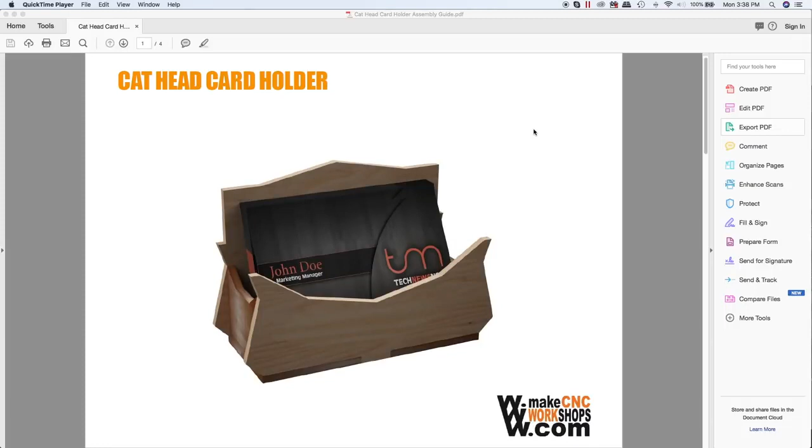In this video, we are going to make the MakeCNC.com business card holder. This is one of 5 projects that we've partnered with MakeCNC on. And as an owner of a STEPCRAFT CNC machine, you can receive these files for absolutely free for your own use. And this is a great way for you to get started with your new CNC system.

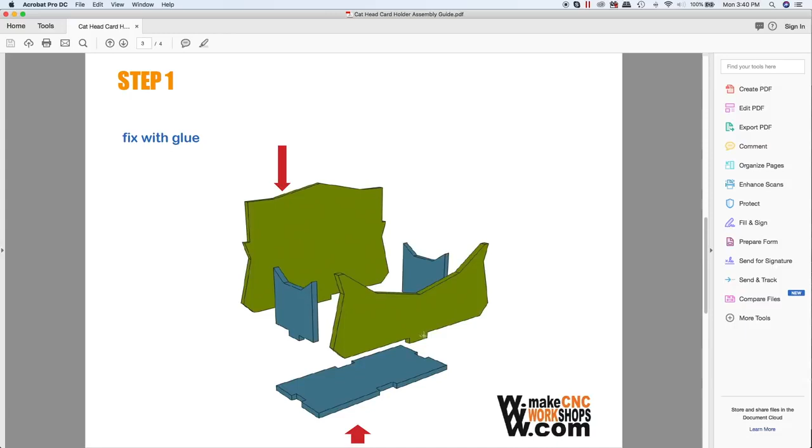So if you scroll down, every project that you get from MakeCNC comes with this really nice digital instruction manual that's full color with nice photos. And you can see here as I scroll through, these are the 5 pieces that we're going to be cutting out on the CNC machine. And here is the assembly document that shows you how everything goes together, and you use glue to attach them. And this is a side view of the same business card holder.

So it's a really cool project. It's simple, but it does give you a good overview on how to use some basic functionality and importing DXF files into Vectric, and how to output the G code so you can run this project on your CNC.

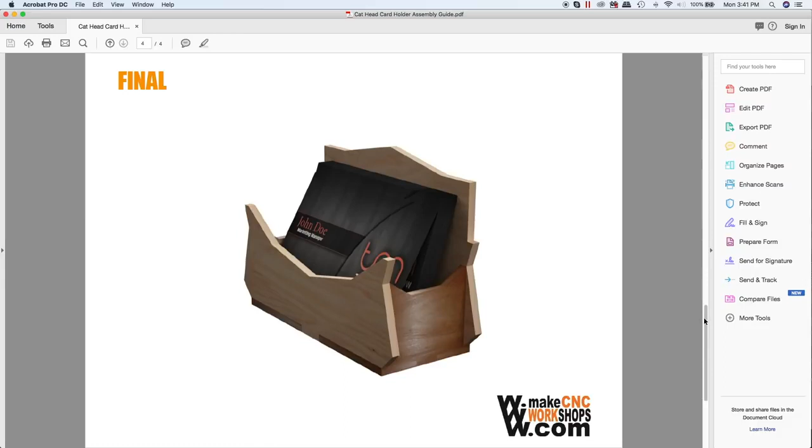Now, one thing that's important to notice is this is a puzzle project, and all the MakeCNC puzzles have these kind of tongue and groove and keyways that they use. So this front panel has this tab that's down here, and then the bottom panel has this notch out here, so this tab fits in this notch.

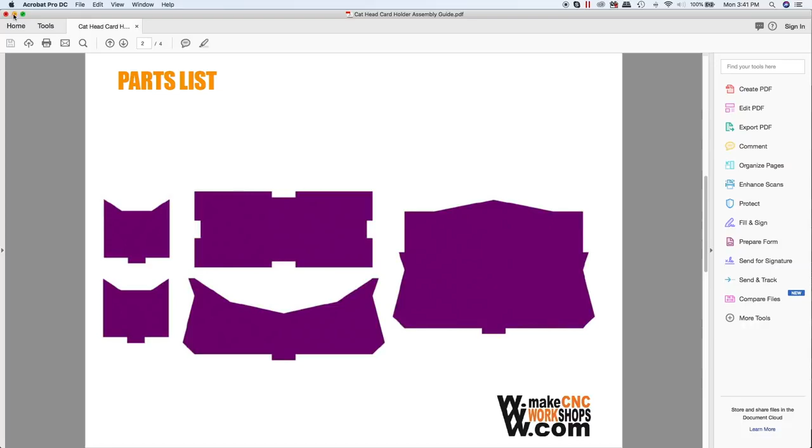Now, one thing that we're going to have to deal with is the fact that with a CNC machine, we're using round tools, which means we can't get a perfect inside corner. If you were cutting this with a laser, you could get a square inside corner, but with a CNC machine, you're always using a round tool. Even if it's just a small 1/16 inch end mill, you're still going to have a radius in the corner. So let's dive right in, and I'll explain to you how to do this project.

Okay, so the first thing we need to do is open up Cut2D. Now, it's important to mention I'm using Cut2D Desktop here because you really don't need Vectric's top-of-the-line programs in order to make this project. However, if you have VCarve, VCarve Pro, or Aspire, you can do the same thing. All the same functionality appears. It's just Cut2D is the base program that we sell, and the desktop version has the 24 by 24 inch limitation. But again, for this project, it's perfect. So it's a great program, and we're gonna jump right in here, and I'll show you how to do this.

So the first thing we're going to do is create a new file. Now, I went and bought a piece of wood from Michael's Crafts. It's from Revel. It's in their hobby section where they'll have like balsa wood sticks and plywood, etc. And I bought a piece that was 12 inches by 24 inches, and they label it as 1/8 inch thick. So this project's not very big, so I've set it up for the 12 inch width. I've set my height up to be 6 inches. And I put 0.125 in as my thickness, so 1/8 of an inch.

This is a single-sided job, and I'm going to position my Z0. This is where the tip of the end mill is going to touch against the top of the material for its 0 position. You can do either the top of the material or the machine bed. For this particular project, we're going to use the material surface. The XY datum, what that means is that's the position on the XY on the machine where you will put your end mill and 0 out UCCNC.

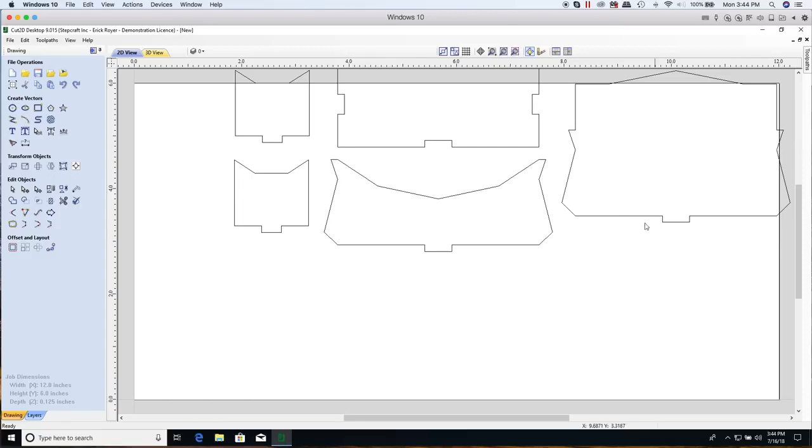Okay, so here are the pieces that they give you, and everything is set to 1/8 of an inch. So the first thing I want to do here is I like to center everything in my workspace just so I can see it here. So we're going to click the Align tool and Align to Material. That's going to move everything nicely to the center.

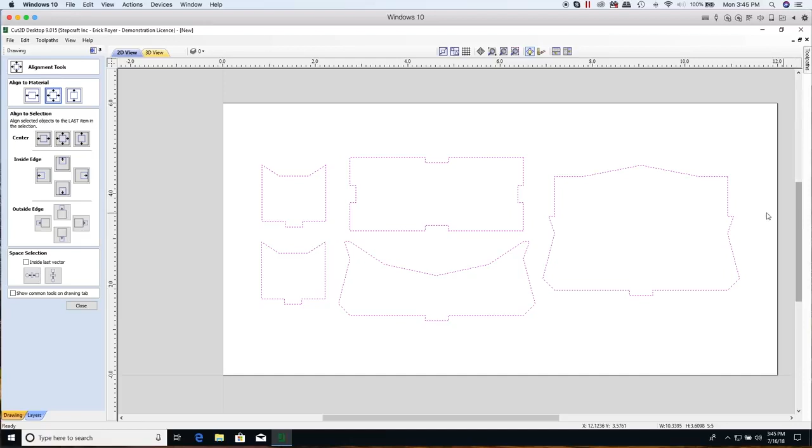You may see my zooming in and out appear fast quite a bit. That's my magic mouse on my Apple that I'm using, and it's a little sensitive.

Now, again, what's important here is this file has been scaled to 1/8 of an inch. So what that means is that they're counting on the thickness of each of these pieces to be exactly 1/8 of an inch thick. And when this side piece is standing up in this slot, the face of this should be even with the face of the wood here.

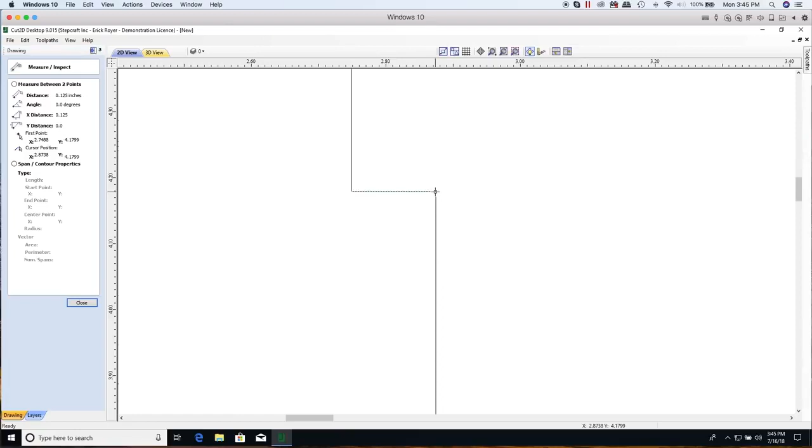So if we use the measuring tool and we zoom in here, we can see that this is exactly 0.125 inches deep right here. Okay, the reason I mention that is because not every piece of wood is the same thickness. And even though they say it's 1/8 of an inch, it may not necessarily be 1/8 of an inch. For example, this particular piece of wood, when I use a digital caliper on it, is supposed to be 0.125. It's actually 0.121.

Now, why that's important is if the material is thinner than what you've got this job scaled to, then this outside surface is going to match up here, but you're going to have a gap on the inside. The puzzle just won't fit together as nicely. And on other pieces that have a keyhole in the center that you're putting something in, if your wood is too thick, then it won't fit. So that's another thing to be concerned about. I'm always worried more about the material being too thick than too thin.

So one thing we can do here is we can scale this job. So how do we do that? Let's see. So this is already designed to 0.125. So one thing we're going to do is we are going to go to stepcraft.us/scale. And this is a simple scale calculator that we've had on our website. You can put in the original material thickness. So in this case, it's going to be 0.125 inch.

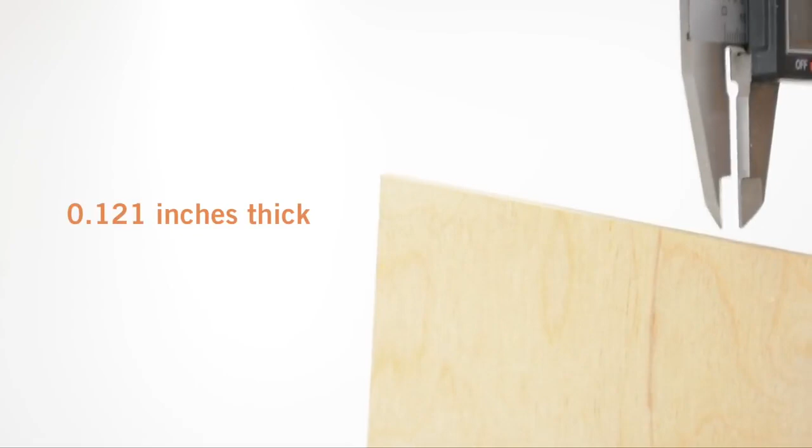When they say original material thickness, they mean the thickness that this job has been designed to, that the DXF file is scaled to. And then the desired material thickness is the actual thickness of our material. I will probably change these in the future to be a little bit more clear on that. So we're going to do 0.121. And then we click calculate. And that's going to give us a scale percentage of 96.80. So we're going to copy that.

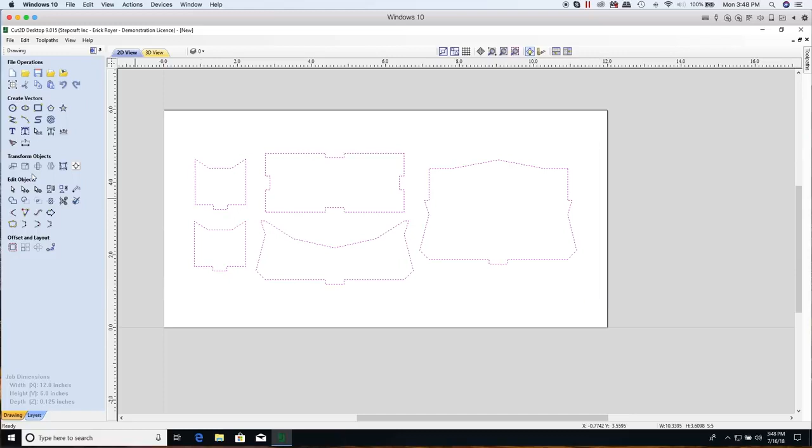Then we're going to go back to Cut 2D. And what we're going to do here is we're going to select everything. And then we're going to go here to this transform object, the second icon in. When you hover over it, it says set selected object size. We're going to click that. And you can see here, first thing we want to do is make sure that X and Y are linked together. And this is going to tell you that this is the overall width and height of what has been selected. And you can see that's at 100%.

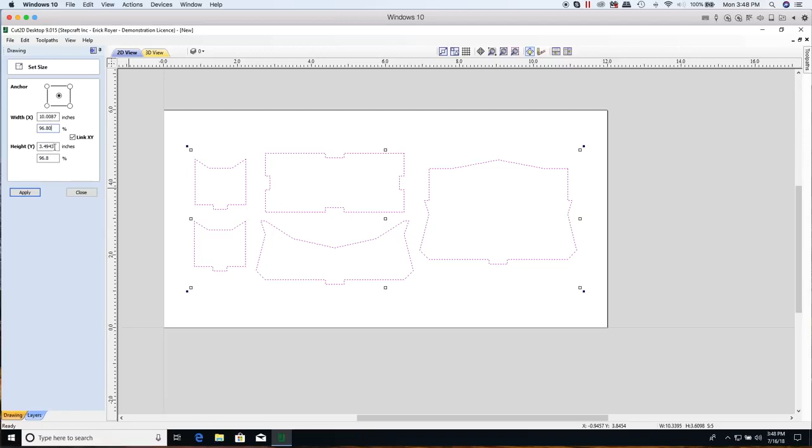So what we're going to do is we're going to select 100%, and then we are going to right click and we are going to paste our new value in at 96.8%. And you'll see what it did was it actually made the width and the height a little bit smaller. When we click apply, you'll see the entire job scales just a little bit.

Now, let's look at what happened here. If we click on the measuring tool again and we click from this corner to this corner, you will see that the new size is now 0.121. So when this piece goes into here, it'll now be perfectly flush to the side.

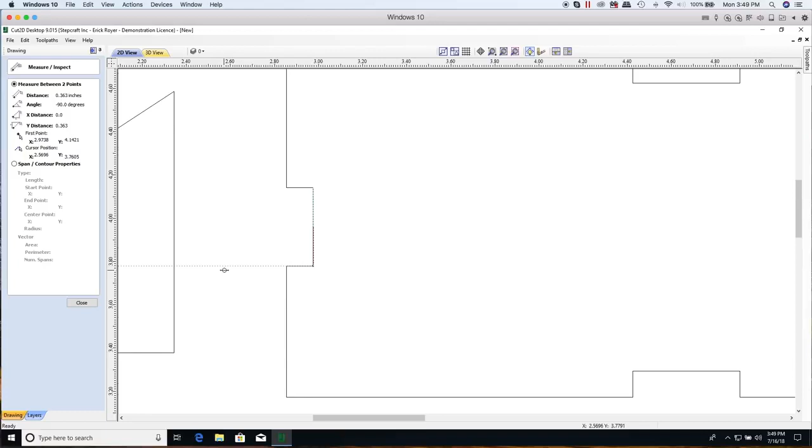And the other thing too is that it also scales the height of the tab as well. So from here to here right now is 0.363. If we were to look at this from here to here, you'll see it also says 0.363. So that's an easy way to scale your entire project down to match your material thickness.

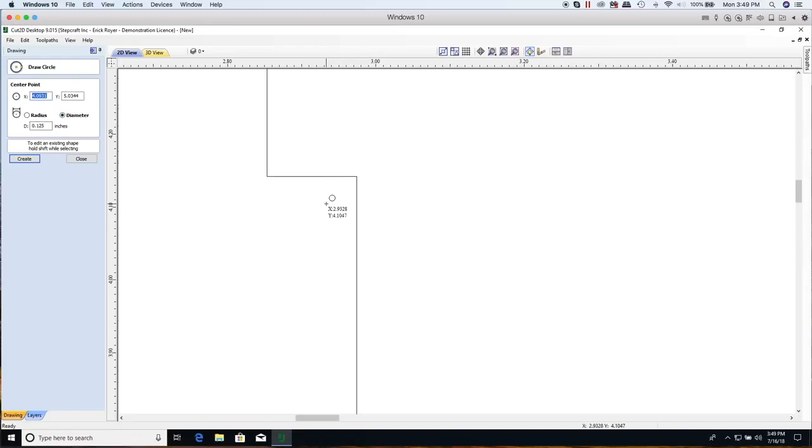Okay, so the next thing we have to look at here is, like I said in the beginning of this video, we do not cut square inside corners with a CNC. What's going to happen is we're actually going to cut a corner that's going to have a small radius. So if I were to create a diameter right here of 0.125 inches, because I'm going to use an 1/8 inch end mill to cut this, that would be 0.125.

So this circle represents my end mill. And you could see that that is as far as my end mill can get into the corner. So we won't have a square corner. We're going to have a rounded corner leaving material right here. And that's going to be a problem for the fitment of the parts. When you go to slide the side piece into here, it's probably going to stop somewhere around here because you can't push it in any further.

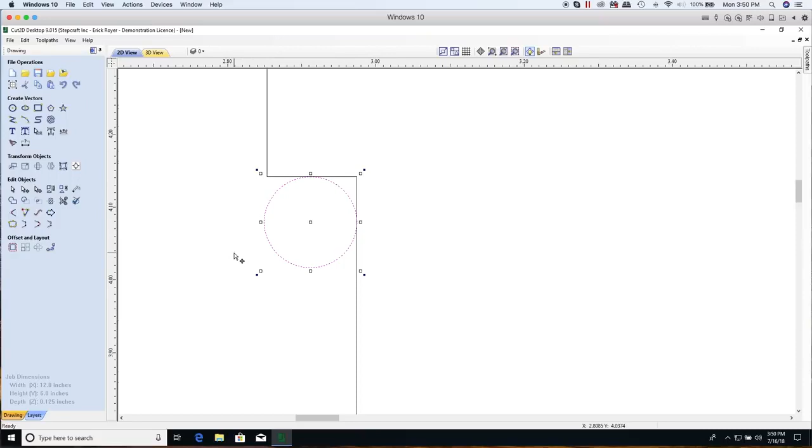So this just gives you an idea what the end mill is. Now what this will actually look like if I were to fillet this corner, this is the actual cut path that would happen with an 1/8 inch end mill. So you can see it's no longer square. That's what you would end up having. So you'd be trying to put a piece that has a square corner in here, and it's just not going to fit. So what we can do here is we can create dog bone fillets.

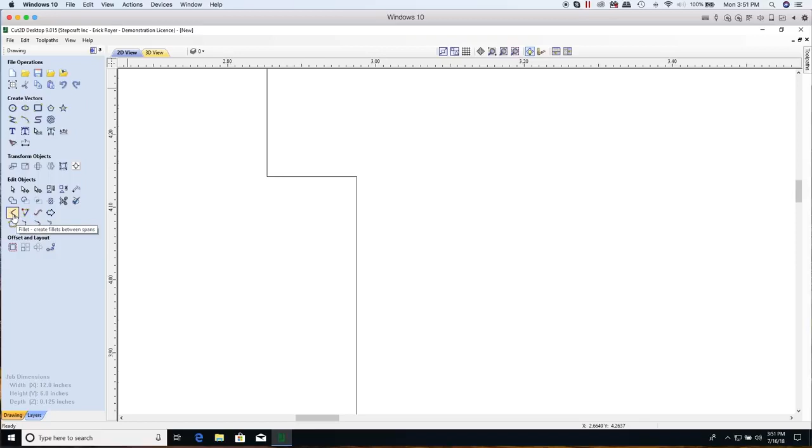And that's pretty easy to do. In Vectric, you can click this button here. It's the fillet object tool, and we're going to click that. We're going to put in the tool radius, not the diameter. So I'm going to use an 1/8 inch end mill, so I got 0.0625, which is 1/16 of an inch, set as my tool radius.

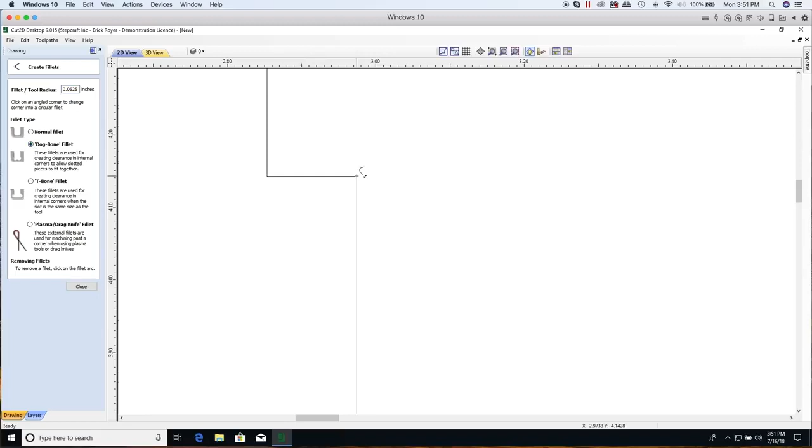I've got two different types of fillets that I can do here. I could do a dog bone fillet or I could do a T-bone fillet, and it really is personal preference as to what the final output looks like. If I were to select a dog bone fillet, you'll see it's going to notch out that corner by the diameter of the end mill. And if I do it on this side, it looks like part of a dog bone. That's why they call it that.

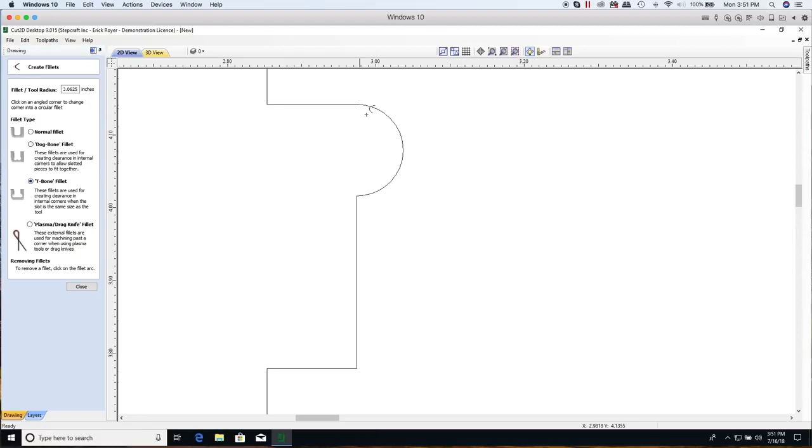The other way we could do this is we could use a T-bone fillet, which is going to basically notch it like this. I don't personally like the T-bone fillet because it leaves too much material open here, and I would rather use the dog bone, and that way I have a little bit of material here and a little bit of material here. So we're going to change this over to a dog bone fillet, and that's what you end up seeing.

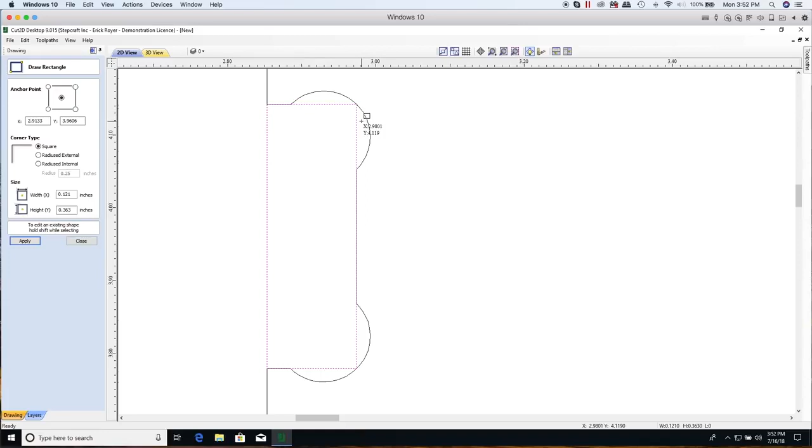Now when I go ahead and I put my piece in here, you'll see now that it will fit perfectly because the corner is cut away, so that side piece is going to fit in without any problems at all. So we're going to go ahead and delete that square I just drew. And now what we need to do is go around and do a dog bone fillet on all inside corners.

So we're going to have to do them here. Again, on the tab, we have to do this because if we don't, the same thing will happen. You won't be able to push this piece down and you'll end up with a gap under both sides. So we're gonna do this. We have to do these here, this one here, and let's see, we got these here, this one here, and that should be it.

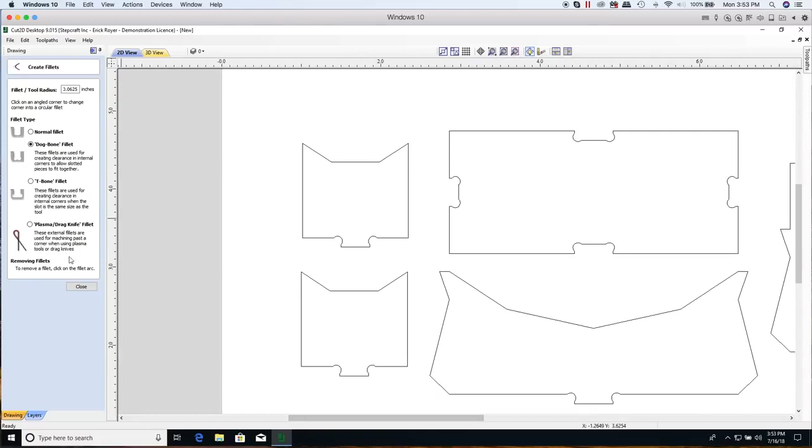So now everything has got fillets on it. Some of the MakeCNC.com puzzles are already filleted, which is nice. This particular one wasn't, which is actually good because I get to show you how to do it.

Okay, so the last step here before we create a toolpath is I don't want to cut this out right now just like this, how this is laid out, because if I do, what's going to happen is I've got a lot of waste material, and why throw away all that material? I could almost make two of these projects in this same space.

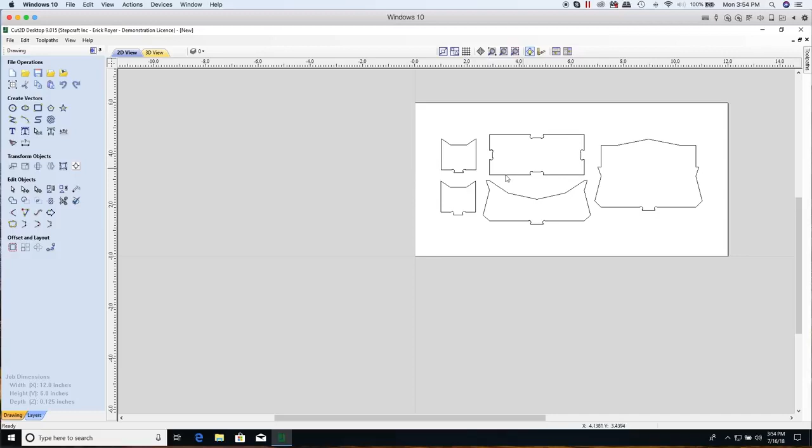So on the Pro version of Cut2D and the Pro version of VCarve, they have an auto nesting feature, which is kind of nice because you could just select everything, tell it your tool diameter, tell it how far you want to space the parts, hit one button, and it arranges it automatically for you. But unfortunately, we don't have that here. So we are going to have to manually nest things a little bit.

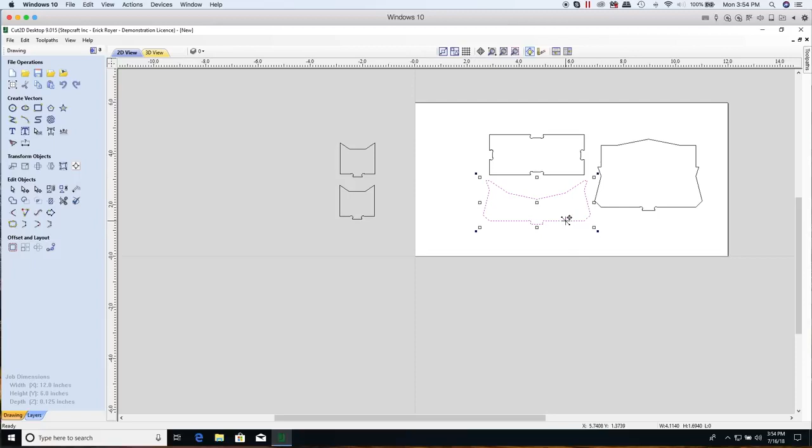So what I'm going to do here is I'm going to take this part here, and I'm just going to highlight it and then double click it, and you'll see all these handles that appear. If you put your mouse over until you see this icon, you can click down and actually drag it around where you want it. So I'm going to move this into the corner, and then I am actually going to move this piece in next.

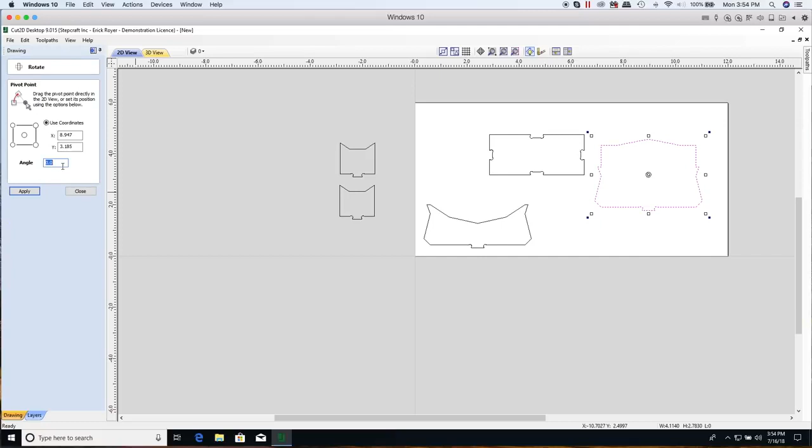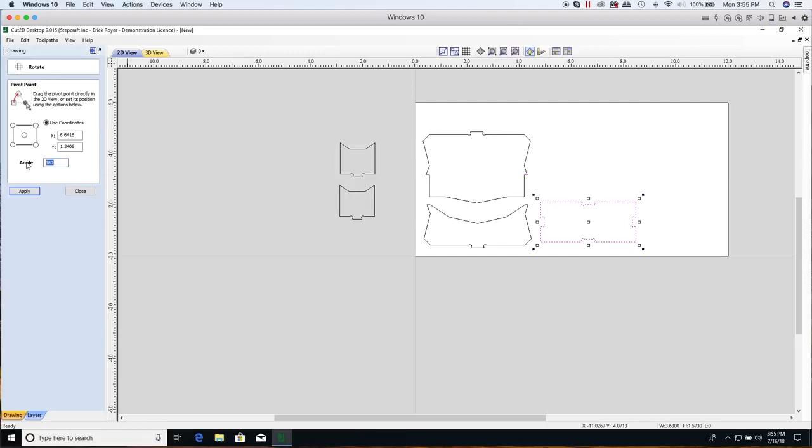But see how this is kind of U'd out here and this is bumped up a little. I'm going to go ahead and use the rotate command. So that's this button right here. And I'm going to say I want to rotate this by 180 degrees, which is essentially going to flip it upside down. Then, same thing, we're going to hold it and drag over here. And now I've got that right on top of it. We're going to click this piece here, and we're going to rotate this one 90 degrees and click apply.

Now, sometimes on puzzle parts, you may not want to rotate them 90 degrees. What you have to keep in mind is if your wood grain is going up and down, then you may want the wood grain to be going in the same direction on all pieces. In this case, I want it to go in the same direction on the front and back and sides, but I don't necessarily care what direction it goes on the bottom because it's the bottom.

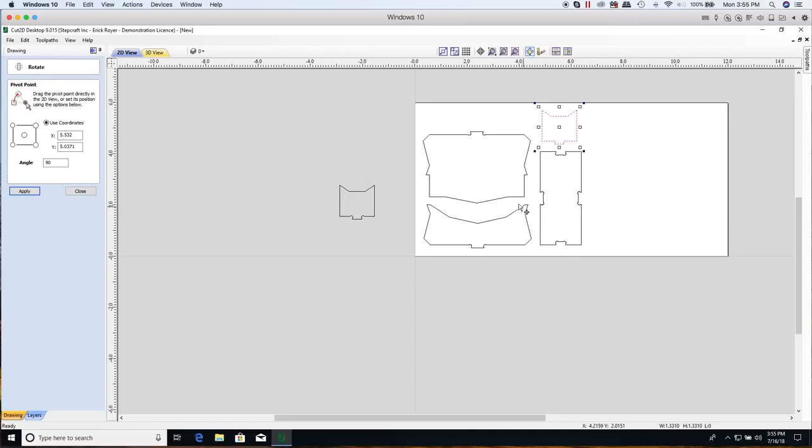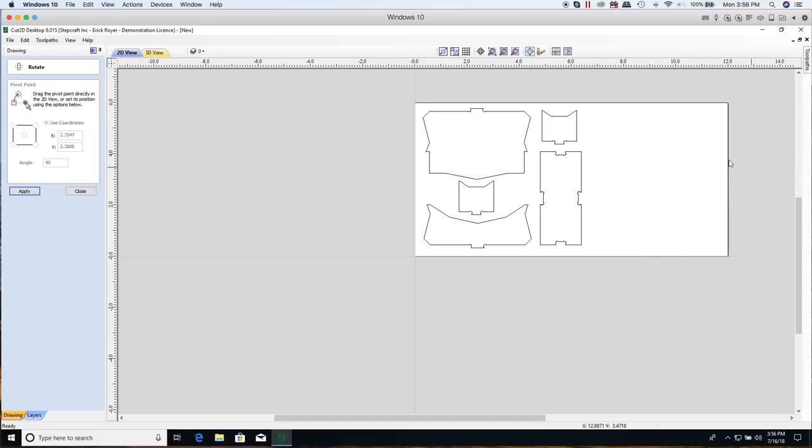So we're going to take this piece here, and we're going to double click it and move it, and we can probably fit that here. And then if we move this up like this, we could probably get this piece, yep, right in there. Perfect. So now you see I've nested this, and when I cut this out, now I know I have this space for other parts. I could put this piece of material back on the CNC and use it for something else later. So now I've got my parts all laid out. This is how I want to do it.

And now I'm going to create a toolpath. So I'm going to go over to the toolpaths tab here, and you'll see this slides out. I'm just going to click on this button here, which is the auto hide. That's going to pin this window open. I like to work that way because I like to have both sides open so I can manipulate my work as I'm doing it here.

So what we'll do is we'll select everything. So start in the upper corner, hold your mouse down and drag so everything is highlighted. And since everything is dashed purple, that means that it's currently selected.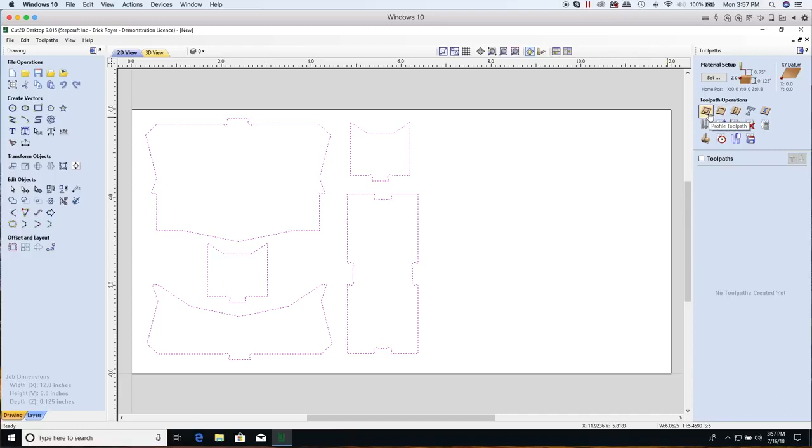So we're going to go over here, and there's several toolpaths here in Cut2D. The main ones are a profile and a pocket, and then of course there's an engraving and an inlay, and then a drilling toolpath. But this is a pretty simple project, so all we have to do is worry about the profile toolpath. So we're going to click on that, and there's a lot of stuff here. I'm going to try to make this as simple as possible.

Our start depth is the top of the material, and our cut depth, because we said the material thickness is 0.125, we're going to make this cut depth 0.125. Now, here's something that's important to remember. When we set this up, we're going to put a piece of sacrificial material underneath it. We call it a spoil board. It doesn't have to be too thick in this case, but I think I have a piece of 1/4-inch plywood that I can lay underneath this job when I fix it down. And the reason for that is because I actually want to cut all the way through the material.

If I only cut 0.125 and there's any deviation in the thickness of this material between the starting point down here and the finishing point up here, you might find that some parts are not cut out all the way, and then you've got to go back in with a razor blade, cut them out, and then sand them. Since I have a CNC machine, I don't like to sand if I don't have to. So what I usually do is I go 0.006 deeper than the material actually is. So in this case, I will go 0.131 for my depth. That's going to ensure that I cut all the way through, and that I'm actually cutting into the spoil board a little bit, but I will have a nice clean top and bottom cut on these parts.

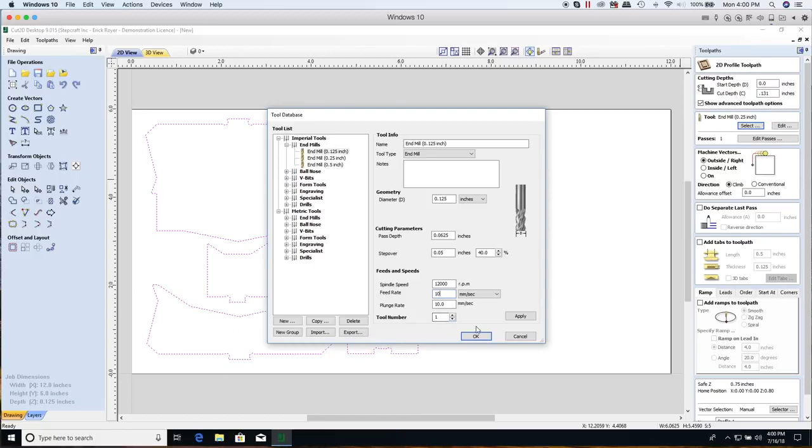And our plunge rate, which is the speed that the bit enters the material vertically, we'll leave set also at 10 millimeters a second. Tool number is only if your machine has a tool changer. In this case, we don't have one on this machine, so we're going to leave it at 1. I'm going to click OK. And you're going to see over here that it's going to take 2 passes to cut all the way through this material, which makes sense. We set it to a 1/16 inch per pass. It rounds up, which is nice, so it actually won't do this in 3 passes, which is good.

Now, the next thing is we've got to determine where we're going to machine our vectors. Basically what that means is whether we are going to cut outside this line, inside the line, or on the line. If we cut on the line, this part will be 1/16 of an inch smaller all the way around, but 1/8 of an inch in total, left to right and vertically. So we don't want to do that. Usually on the line is used when you're using an engraving tool with a fine point, or like a STEPCRAFT drag knife or a wood burning pen, where you actually want the tool to run exactly on the line. Inside the line would be great if there was a hole in the center here.

Then I would want to cut that hole out inside the line so it maintains that diameter. But in this case, everything we're doing here, nice and simple, we're going to cut outside the line. And we're going to do this with a standard conventional milling, which basically the end mill is always spinning in a clockwise direction, and a conventional also moves in a clockwise direction, whereas a climb milling, if you were to select that, it actually moves opposite the direction that the end mill is spinning. So the end mill is spinning clockwise, but we're going around counterclockwise.

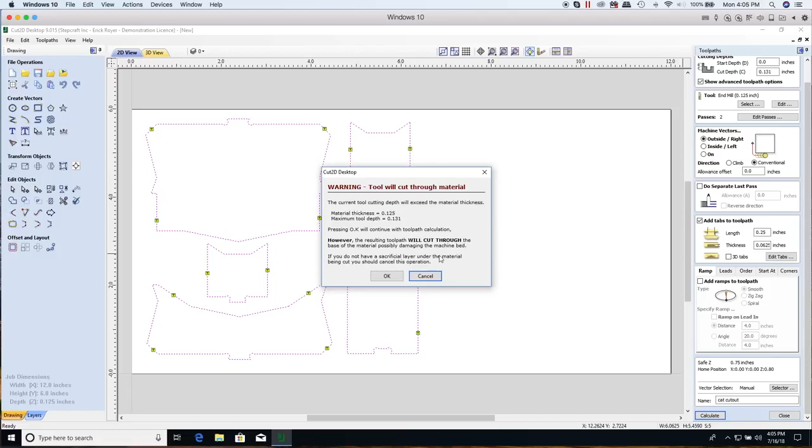So it's okay. It's just warning you that it's going to cut all the way through the base of the material. And if you don't have a spoil board in there, you could possibly damage the machine bed. So we don't want to see that happen. It's reminding you that you should put a sacrificial layer under the material. So we click OK. And now you can see these blue lines. That's the toolpath. So that's where your tool is going to actually run on the CNC machine.

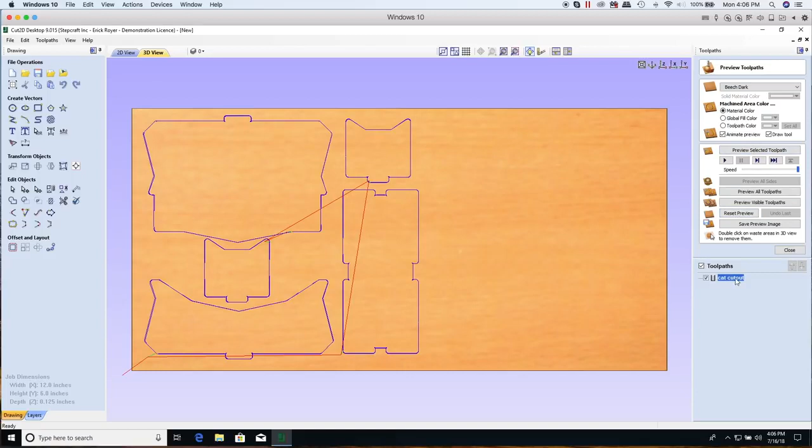So what we're going to do now is we are going to make sure this is selected and checked. We're going to click on Preview Selected Toolpath. This is a really cool feature with Vectric. When you do that, it simulates where the tool is going to cut. And you can actually rotate your material, so you can look at the bottom, you can look at the side, so you can see it's an 1/8 inch deep.

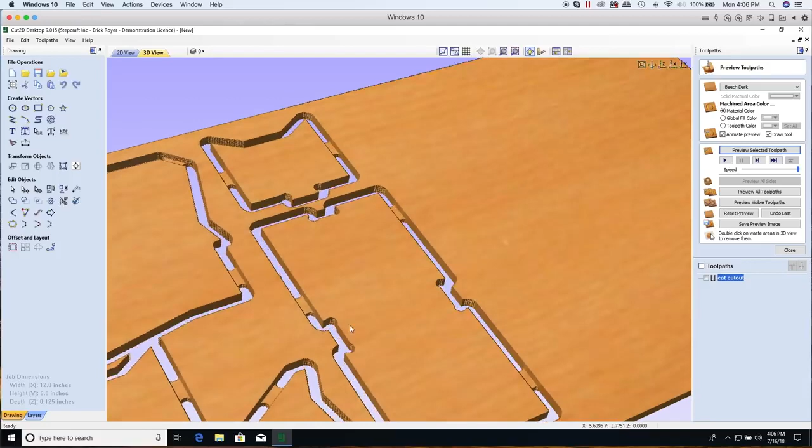You can see that we have the tabs here that are cut. They're 1/4 inch long and they're cut through half the material. And you can see our dog bone fillets all the way around. So this is actually pretty good. Now I do see one potential problem.

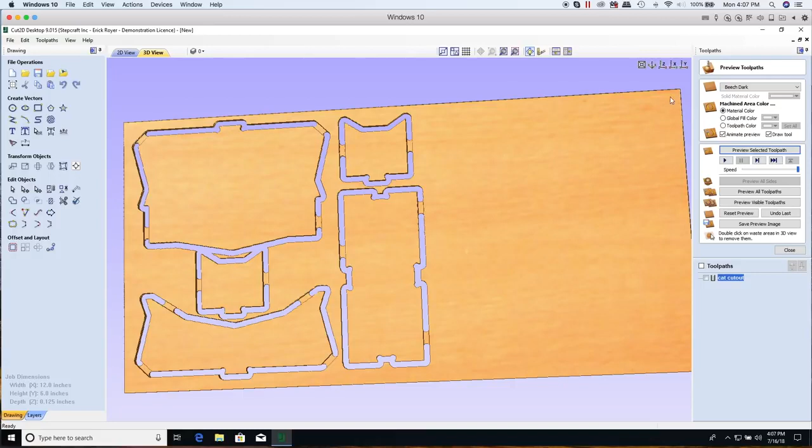Right in here, when we cut here, you'll see this little piece is probably gonna fly out of there because it's gonna break free and it's not held in by anything. So that's potentially going to be a little bit of a problem here. What we could do is we could rearrange the parts so that that doesn't happen. But one quick fix, it'll require like a second or two of extra sanding, is we could just add one more tab.

So if we go back and edit that tool path, we could just add a tab right here and then close. So that'll break free, and then we'll get in there with a small sanding or a file and we will get rid of it. So if I reset the preview here and then select preview selected toolpaths, now you can see that little piece is actually trapped in there and it will not break free on its own, which is good.

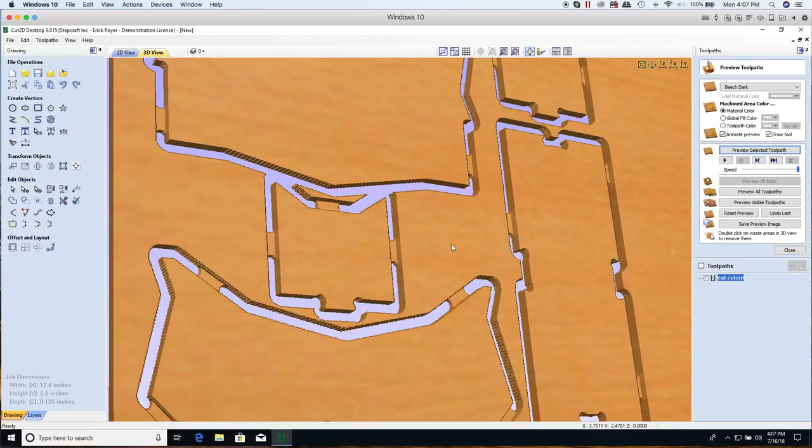It's so small that if we didn't have the tab there, I don't think it would be a big deal. It would just kind of fly out of the way as long as the part is held in place with the tabs on either side. So there you have it. Now we're ready to get over to the CNC machine and cut this thing out.

And then when we're done, we'll just take a razor blade and we'll score along the edges here to cut the tabs off and maybe hit them with a little bit of sandpaper and it'll be perfect. Again, if you have double-sided tape, you can run a few strips on there and then you don't have to worry about tabs at all. So that's really up to you and how you're setting up this job.

So the last step here is we have to take this tool path and output it so that it can be run on the CNC machine. So we're going to check the tool path for the cat cutout, click close, and then we're going to click on this disk icon. It's called Save Toolpath. When we click on that, we're going to see there's a huge list in here of all the different CNC manufacturers that Vectric works with. But you're going to want to look for the STEPCRAFT ones.

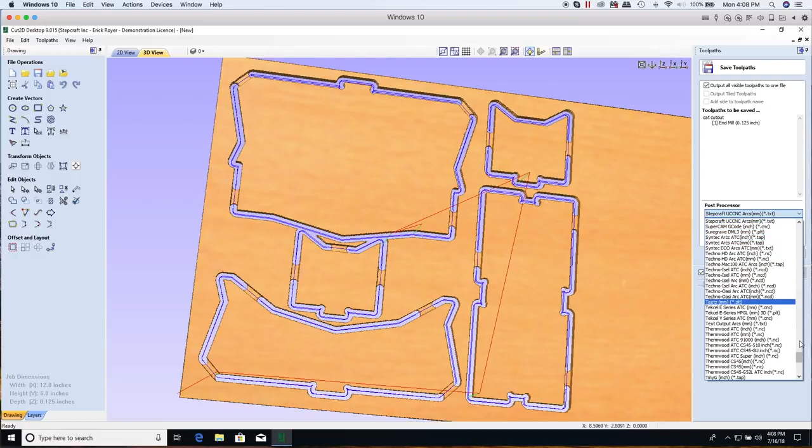And you'll see that there's really two different types here. There's a STEPCRAFT UCCNC ATC ARCS. ATC stands for Automatic Tool Changer. So if your CNC has an automatic tool changer, then you can select this post processor. However, if it doesn't, like ours won't, then we will select this post processor, which is just the ARCS, and it's in millimeters. Now that brings up another good point, because a lot of people ask that.

UCCNC requires that we input the file in metric and not imperial dimensions. Now you notice that when we set this job up, we set it to 12 by 6 inches, an 1/8 inch thick, and we brought in a DXF file that was also an 1/8 inch thick. It was set up for that. So a lot of people will ask us, geez, I don't want to work in millimeters.

Well, that's the cool thing about Vectric and this post processor that we wrote. You don't need to. So you can design in inches, and then as long as you select this post processor, Vectric will actually do all the work and calculate all of the inch dimensions over to metric automatically. So you don't ever have to worry about using metric if you don't want to.

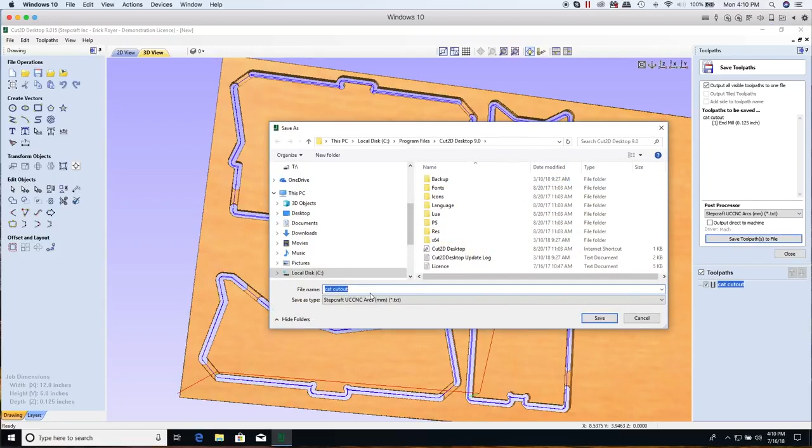So what we're going to do lastly is we're just going to click Save Toolpath to File. I'll just save it on the desktop. We'll call it cat cutout, and now we're done. We'll take that cat cutout file over to the CNC, and we will go ahead and cut this thing out.